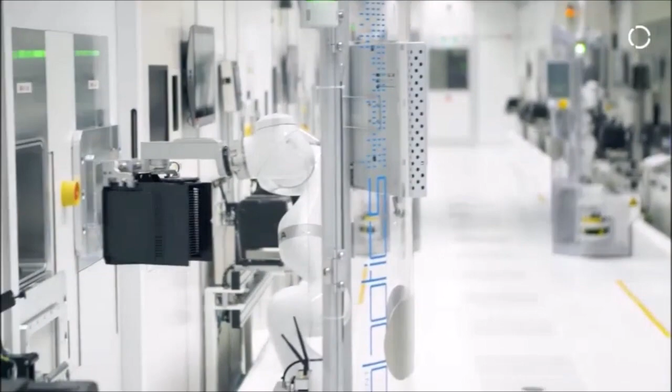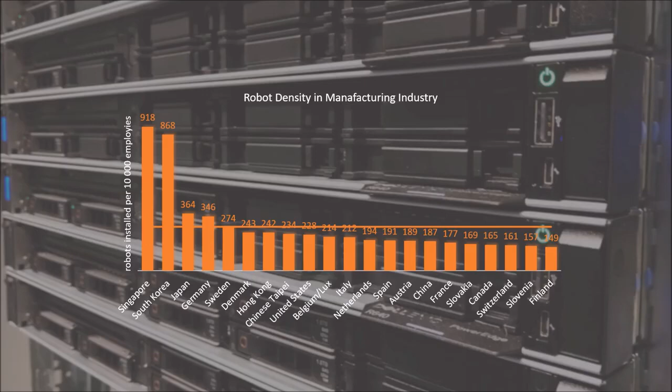To accommodate rising economic challenges, industrial automation is rapidly increasing application of robots in production systems. According to the International Federation of Robotics, global density of robots per 10,000 workers in industrial production systems increased from 66 in 2015 to 117 in 2019.

We're witnessing a major change in the industrial production landscape. The rapid growth of smart IoT solutions and data-driven processes is creating new emerging markets and new insights in existing industrial systems. This is creating a smarter and more sustainable industrial ecosystem.

The ability to introduce new components into a system and expand its capacity is an essential feature for smart industrial facilities. We need to ensure that we can perform such actions without violating existing safety and security constraints.

In this use case, two cooperating production systems with autonomous mobile robots are coordinated by a central control unit that distributes the tasks and monitors the execution of the tasks in near real time.

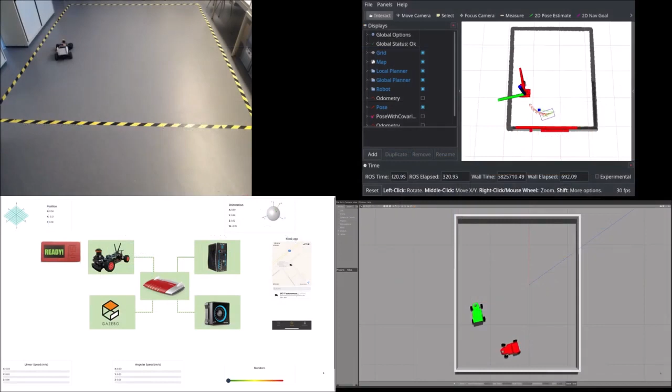We implemented this use case in a mixed reality environment, where one robot is physical while the others are its digital twins. The robots are able to interact as if they are all in the same physical environment.

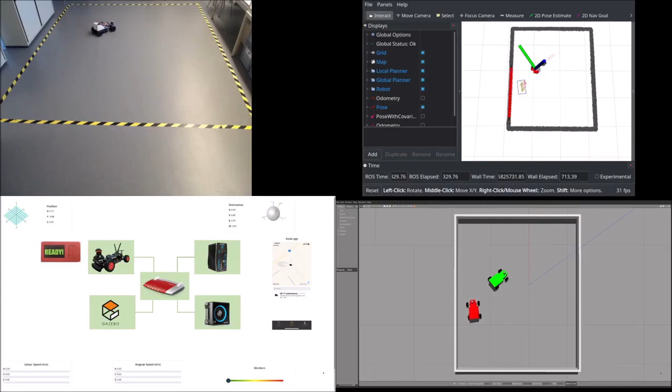This technology allows us to simulate emerging behaviors in industrial autonomous mobile robots and validate system properties under these new conditions. To demonstrate this, we prepared three scenarios: a follow-the-leader scenario, an intersection scenario, and a station positioning scenario.

In the first scenario, we observed how a real robot is precisely followed by a simulated robot while carefully avoiding collisions.

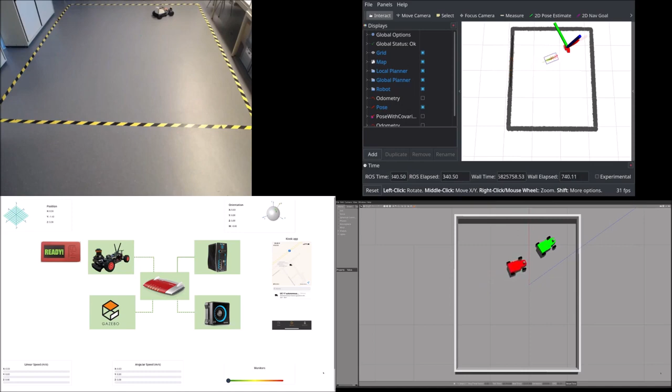In the second scenario, we observe how two robots are behaving in an intersection scenario.

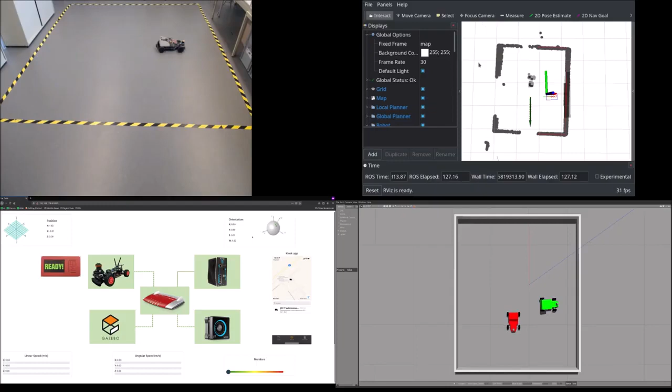And in the final scenario, we can observe how a real robot is cooperating with the simulated robot on a station task scheduling scenario.